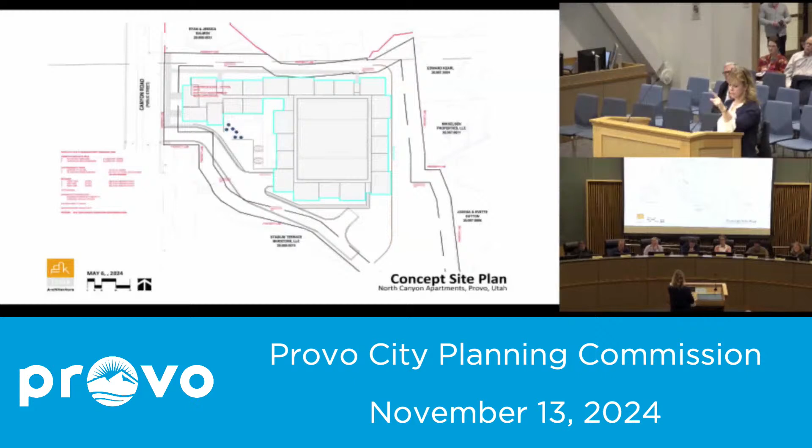And this upgrade would be intended to accommodate the increased demand from the proposed development and improve system reliability for the surrounding area. Then with the concept plan, one thing to note, the plan notes specify 100 units, but when you go to the illustrations, it's actually only showing 93. I can give you the breakdown between 1, 2, and 3 bedroom. The required parking for the bedroom count is 201 off-street parking spaces, and the submitted plan includes 240 off-street parking spaces.

As for the staff analysis for the rezone and the concept plan, staff is encouraged to reference the questions asked on page 45 of the general plan. And if you want me to go over any of those specific questions, I'd be happy to.

But just as a conclusion for staff, I provided you with that letter addressing the municipal council budget priorities for fiscal year 2025. The first one listed is to increase homeowner occupancy by 50%, or to 50% by 2029, through a balance of home types. This proposal aligns with the adjacent land uses. For sale housing is a stated priority of the municipal council, and whether there is to be for sale units and to what degree remains unanswered.

The commitment to the sewer system improvements and the approved grading along the eastern boundary will help mitigate impacts on neighboring single-family residences and support long-term infrastructure needs. Staff is comfortable with the zone change from R1.8 to medium density residential in terms of scale and housing density. However, with for sale housing being a stated goal of the municipal council and the issue being unresolved, staff has hesitancy with the recommendation for approval.

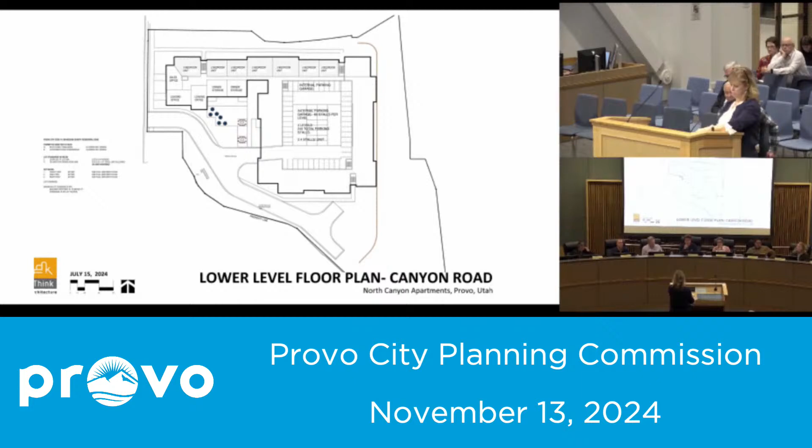Sorry, I'm going through the things in the wrong way. I'm pretty sure we had a diagram that showed where the current slope exists, but the developer might be able to answer that question specifically.

My last question is more about procedure. If a developer proffers a development agreement that says I'm going to make these for-sale units, does the city go about monitoring or overseeing that beyond just the first sale? We say okay, you can now have your certificate of occupancy because we see these were all sold, but beyond that, how does it continue so it doesn't become a rental property instead of an owned property?

That's a good question, probably better answered by Aaron or Bill. One of the things we would do is have a requirement with the city that when the unit changes ownership, it has to be owner occupied for the first year or two years, whatever we agree to. That keeps out institutional purchasers who are going to buy it only to rent it out. It doesn't guarantee they're always going to stay owner occupied, just like single family homes, but at least it has initial owner occupancy and it chases out the institutional investors buying rental units.

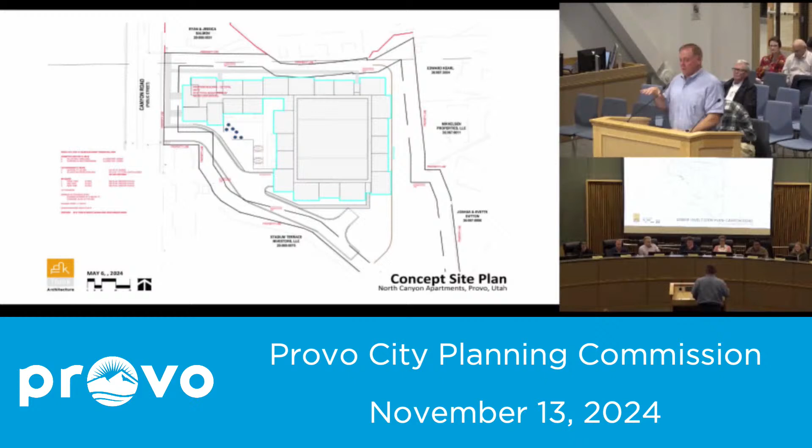It makes it very convenient for any occupants - if they're on the second or third floor, they can drive themselves into the parking lot and have their assigned parking entering at that level, rather than parking and hiking down and back up. So the parking in the middle section, they can drive in, go up to their level, park in front of their unit, and walk directly in. That's the architect's design, which he thought was great for the livability of each of these units.

So as far as the retaining wall, I hope I answered the question - it would not be a separate retaining wall. It'd be part of the construction of the baseline of that back building. And there is still quite a gap between where the back of that building would be and the property line. That distance between the two would still be sloped at a 2-to-1 slope. So the windows, if you're referring to, would be looking at the landscaped part of the hillside.

And this is not the final plan. Obviously, that will come back before you. This is the concept plan. But the approval will be based that we can get the earthwork down to a developable state that could further get that information to you. I don't know if that addresses the concerns and some of the questions, or if there's others that may exist that would be advantageous for me to address at this time.

Commissioners, do we have any question for the applicant?

Commissioner Jensen: So just to rephrase what I think you just said, the hillside is a 2-to-1 slope, and the only level that would be below the hillside is level 1, and all the other ones would be above that hillside. Correct. And so level 1 is a parking garage on that side, correct, and level 2 is a parking garage only in the middle. Yeah, well, okay. All the other, you'll have parking on the first and the center part, but there'll be a ramp going up to the second and that may be some of the disparity that is causing the 93 units versus 100.

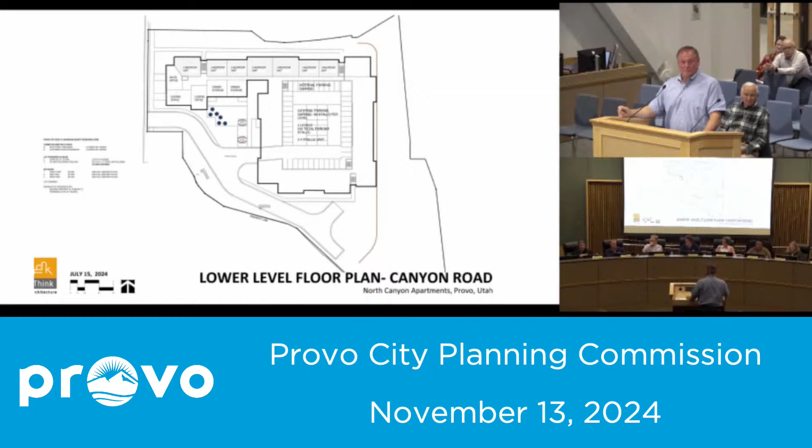I had a question. I didn't hear the breakdown of how many units of each bedroom count, and I'm glad to see 3-bedroom units because that is great. I think there are families who would be happy to live in this kind of community. But I would like to hear the breakdown more specifically. I don't know that I even have it in front of me. You probably have more than I do. I have it.

There is a total of... sorry, let me make sure I've got these correct. I've done it by level. On the lower level, there's 3 three-bedrooms, 4 two-bedrooms. First level has 9 three-bedrooms, 11 two-bedrooms. The second level has 10 three-bedrooms, 11 two-bedrooms, and 4 one-bedrooms. Third level has 10 three-bedrooms, 11 two-bedrooms, and 4 one-bedrooms.

Nancy, would you add those up? Yeah, sit down and add them up and come up later and give those numbers. I will do that. That'd be great, thank you.

And again, that's not a huge issue to me, in the essence that the bigger, the more bedrooms, usually the more cost per unit to do. But I like a mix, and it seems like probably the most common or the most demanded—some of the other complexes I have in both American Fork and in Lehi, the most common desired is a 1-bedroom for a newlywed couple or the like, or a young family. So generally there's more skewed to the 1-bedroom by tradition. And I haven't totally dictated to the architect what I'm pushing for. He was designing by space and what would make the most sense from his perspective. And I've been wrestling more with possible max unit count.

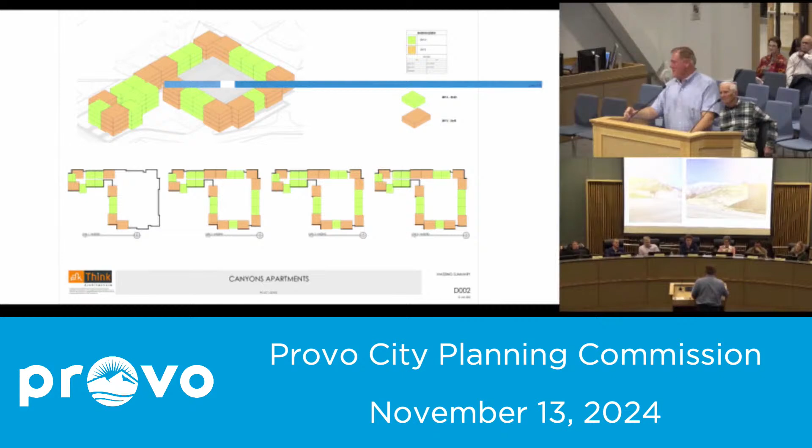I've removed a lot of hills like this over my career. I've been an excavator - we did all the earthwork for the Provo City Center Temple, which was much more intense. Obviously here you're going underneath an existing building, but dealing with the guys who are going to remove it, with the trucks they have planned, it would be moved in roughly 90 days.

Okay, thank you. There are 39 three-bedroom units, 42 two-bedroom units, and 12 one-bedroom units. Okay, thank you. All right, appreciate it.

We're going to now open the hearing to public comments. When your time is up, you'll hear a ding and the microphone will be muted. Each person may make one comment. If we have questions, we'll invite you back to the microphone. This time is for comments only - if you have questions, please speak with staff directly. If there are any neighborhood district chairs present, they will have 3 minutes to comment.

Hello, Sharon Mehmet. Before you start that timer, I want to know if you got the amended staff report, which included our neighborhood meeting concerns. We did, yes. Okay, thank you. All right, I timed it 3:10.

We'll go fast. The staff report mentions the Planning Commission approved the developer's proposal to grade the slope along this boundary in March, which facilitates the transition between the single family and medium density zones. This was given to build 8 homes, which were then approved for the current R1 zone.

The staff report mentions 213 bedrooms specified in the report. She gave it to you. But how close is the developer tied to this building when it begins? Also, he calls out 240 parking spaces.

I love that there are more parking spaces proposed than are required by code - hooray for friends and visitors. Staff feel that the proposal aligns with adjacent land uses in terms of land use, housing density, and scale. This property abuts Garden Villa and another property to the north.

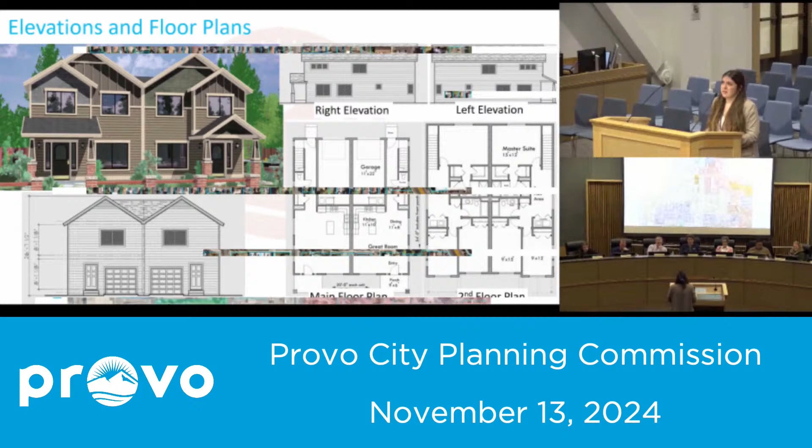Some of the concerns that we got included concerns on home ownership. We've worked with the applicant and let him know that we are very interested in making sure, if this goes through, that these will be subdivided properties with a common area, like the one just to the north, so that they have the potential to be sold. There were other concerns about storm drainage and the effect of construction in the neighborhood. With storm drainage, we would look at that through the project plan and Public Works.

Any questions? I want to know why not just subdivide it and make 2 lots, because then you don't need a zone change. It's 12,000 square feet, you can just cut it in half. You've got 2 lots, bada bing.

It comes in, the flag lot requirements are a little bit stricter. Can't it just go into the back like this one is? If this one's okay to access from the back, why couldn't a subdivision of 2 lots be accessed from the back as well? I see what you mean. Well, a 20-foot fire access. So are you saying, like, why don't we just subdivide it like this? It was hard to see in the picture, but the triplex is its own lot, and then there's another lot in front.

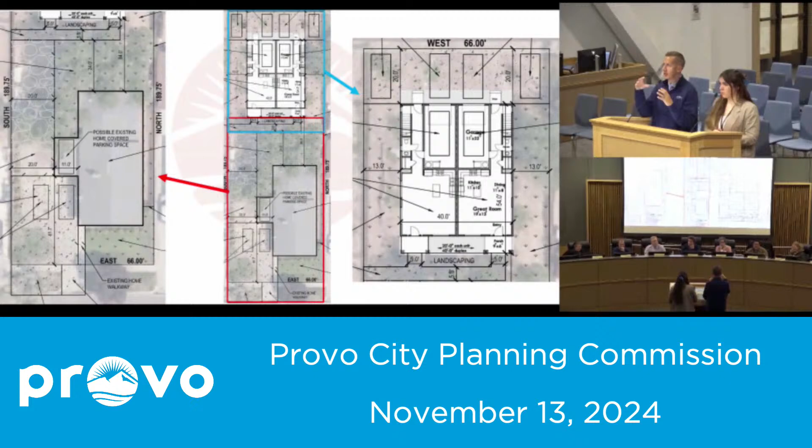I had an additional question: since you have to have that 20-foot gravel spot anyway, why not just have all of them access from 400 South instead of the alley? Then we don't have to worry about the iffiness of alley maintenance and access. Totally makes sense, and that's what they originally proposed, and it was in the neighborhood plan, the neighborhood meeting back in September.

The reason why is that each townhome, each unit here, has to have three parking spots. Fitting that parking as well as driveways and proper turnarounds for someone in the eastern townhome to do a 3-point turn and get out would eat up the entire backyard. So that's why you're using that turnaround space as the alley instead.

That's the idea. I was just sad because the staff report said that it gave so much common open space, and I'm like, it's not really common open space, it's going to be a gravel pad. There's nothing aesthetic or beautiful about that. It's true, technically it is.

Oh, you fixed it, awesome. Thank you. Technically, without the gravel pad and without the parking being in the back, it would be mostly concrete. Okay, okay, thank you.

So the alleyway you said is 12 feet wide. With 20-foot parking spaces leading up into the alley, does that give adequate space to back up and turn around into that narrow alley? Other cars look like they're doing it, but they have more space ahead to curve around. My understanding is that generally in a parking lot you'd need about a 24-foot alley between parking spaces to make the clearance to turn. Is there any concern that cars won't be able to cleanly turn in and out of that limited space?

That is a great point. We'll probably have to go back and look at that. One thing that could be done is to move the townhomes forward a little bit. Trying to preserve green space while also providing 3 parking stalls for each unit is tricky, but I see what you're saying, and you're right. If this gets approved in the project plan, we'll be able to more specifically look at the backing up spaces and make sure there's the correct amount, just like you said. Thank you for bringing that up.

This current alley is being used as the primary access point to some of the houses, right? Like this one over here, for example, they don't have a driveway at all, and so they have this car lot. It looks like that lot is overoccupied, but that's not for me to say. I would report an over occupancy though. This one also doesn't have a driveway, so it's primarily accessed from back here. These people do have a driveway, but clearly they're parking their cars back here, probably because of their garage. And then these people, I believe that's also some type of garage, and they've got a little parking spot there even though they have a driveway. And then there's the one with nothing just to the west.

In terms of fire safety, correct me if my reasoning is wrong, but theoretically the homeowner could just have a giant long house extending all the way to the back of the property. If there's a fire in the back, you'd just have to take the hose to the back of the house. This doesn't seem like a drastic issue, usually you only need fire truck access to the front of the property, then run the hose back if the fire department feels that's okay. It doesn't seem marginally different than the house up and to the right, the fire access is about exactly the same as the back of that house.